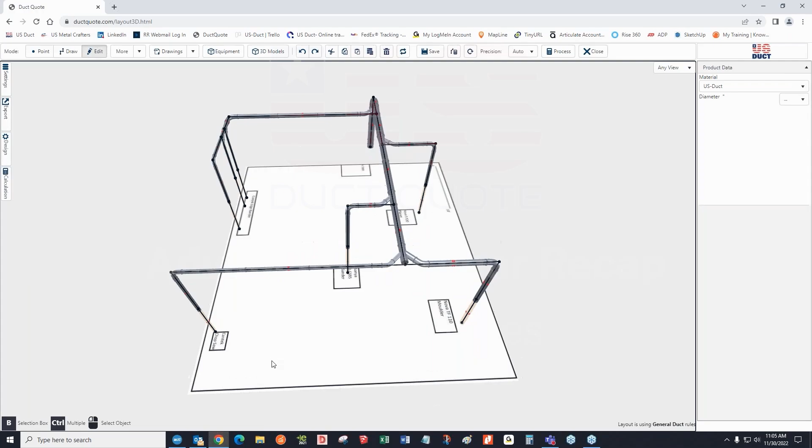I want you to think. DuctQuote is basing everything that it gives you on what you've built out in the design tab and the center lines that you create to tell it where the duct goes. All right.

This is actually what makes DuctQuote so fast and easy, is that all you have to do is draw a line between one point and the next. So you draw the center line and DuctQuote is going to fill in the duct and/or the fittings based on what you've got in the design tab and what you're doing.

Okay. So here we had someone who was looking for a Y branch, a pair of pants Ys. So they drew out until they hit where they wanted to have the trunks that left and went out to the various machines. And then they drew straight from the end over. And then they called me up and said, there's a problem. It keeps giving me a double branch.

Okay, now, so the first thing that you want to ask yourself is, okay, I'm not getting what I expect, so let's pretend that it's my fault. So what did I do wrong from the point of view of DuctQuote, right? So ask yourself, did you draw the center line of a Y branch, or did you draw the center line of something else?

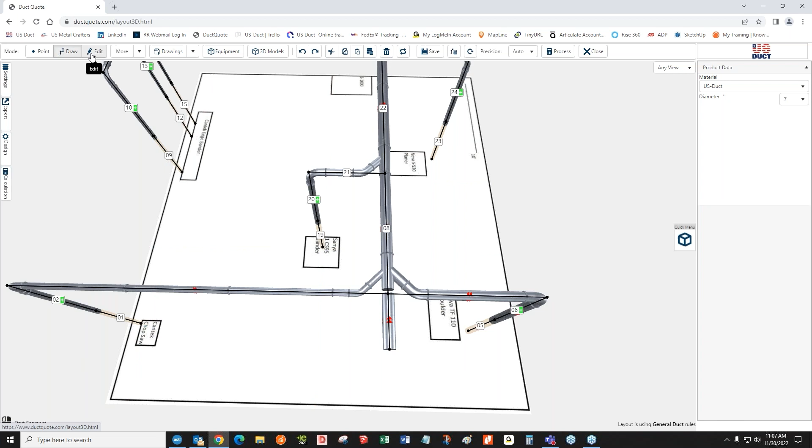We can also say that we're looking at this, and if I change what this is being told over here, where it is looking at a double branch, you can also see that this is also obviously the center lines for a T branch, right? But what we know for a fact is those center lines don't define a Y branch, okay?

So most folks ask the question at this point, they understand, okay, the center lines aren't right. So how do I fix this? Well, what we do is we use the ability in DuctQuote to move the endpoint of a section, not the section. And we're going to back these endpoints up to give us room to finish what we really want.

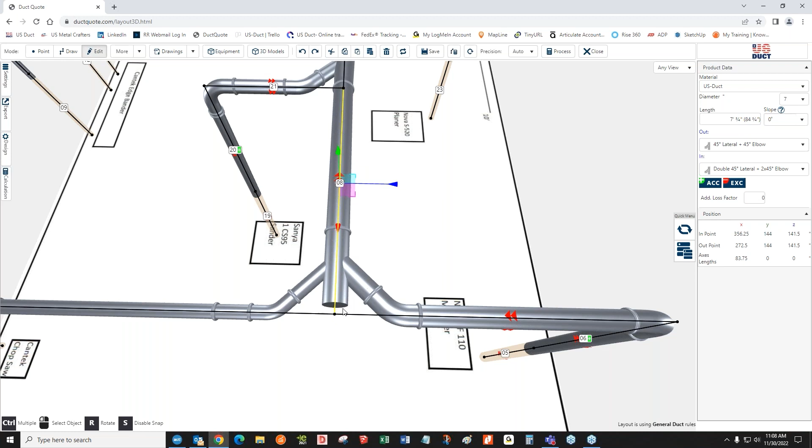Okay, so I'm going to click that endpoint and push this back some. I'm going to click that endpoint and bring it back some. And then finally, I'm going to click that endpoint and move it back some. All right. So remember, we're fixing something. So here's what I would do.

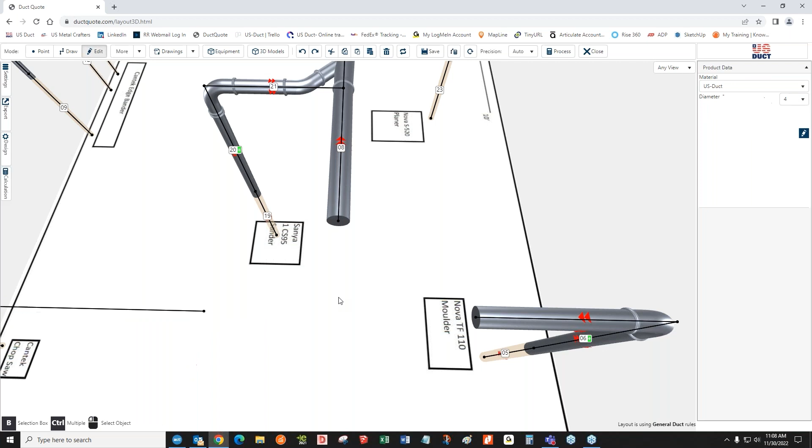I'm going to actually draw my Y branch over here, and this will teach you how to do it right the first time. You're going to come with your trunk to the end, then you're going to draw from that. I'm going to use a 45-degree Y branch. So I'm going to turn this at 45 degrees, and we click there.

Don't get excited about the fact that it gave you something different. I'm drawing with a different diameter than the trunk. So DuctQuote is making an assumption. That's okay. We're going to come over here and we're going to click and we're going to do the same thing for the other side. Okay. And now sometimes I have to select, but sometimes clicking on it is all I need to do.

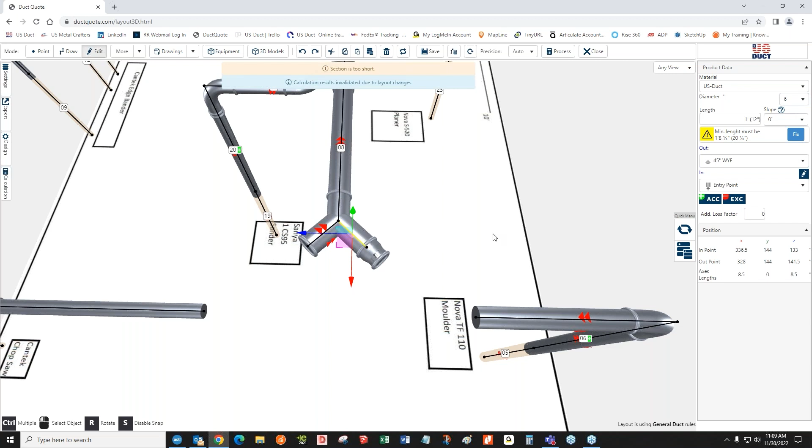As you can see now, DuctQuote recognizes those center lines define a Y branch, okay? So we can see that on this side, we want that Y branch to be a 6-inch. So I'm gonna set this side to be not 4, but 6, okay? This side needs to be 4. So we're gonna set that side to 4, all right?

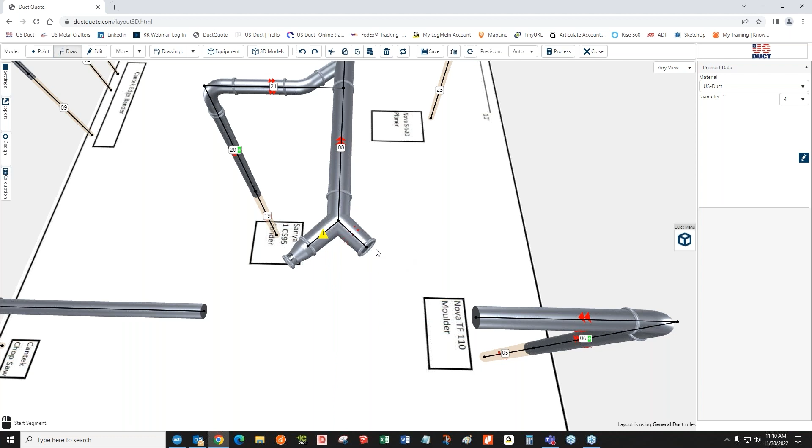And now I'm going to draw a small bit so that it represents these trunks. In other words, I'm going to do this so that I get my elbows in here, okay? So let's go ahead and draw the 6-inch side. We don't need much, just a little. And remember this side is the 4. So we're going to draw a little bit of 4-inch.

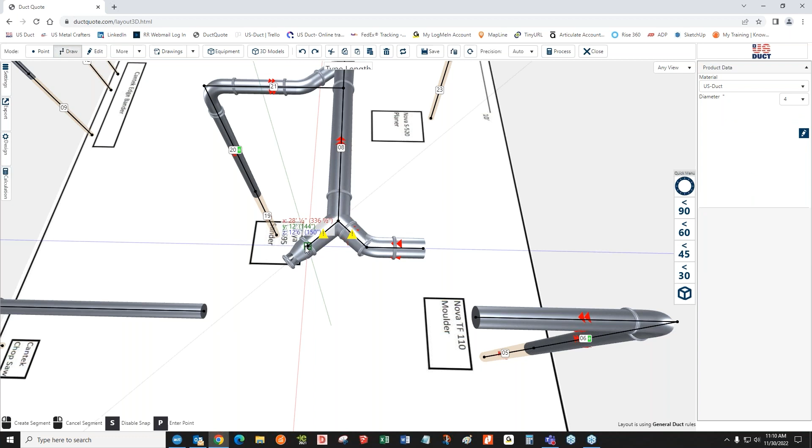Okay. And what I wanted to happen has, and that is that I'm being told these are too short to include the elbows. So we're going to go ahead and let DuctQuote fix that so that we get just the Y branch and the elbow. That's all we want.

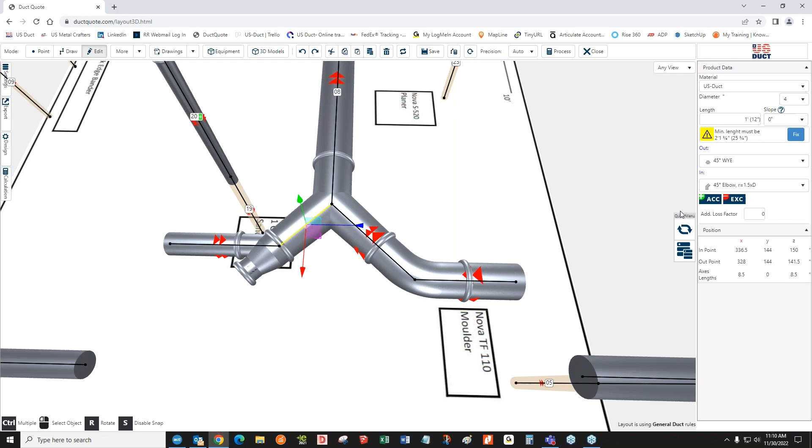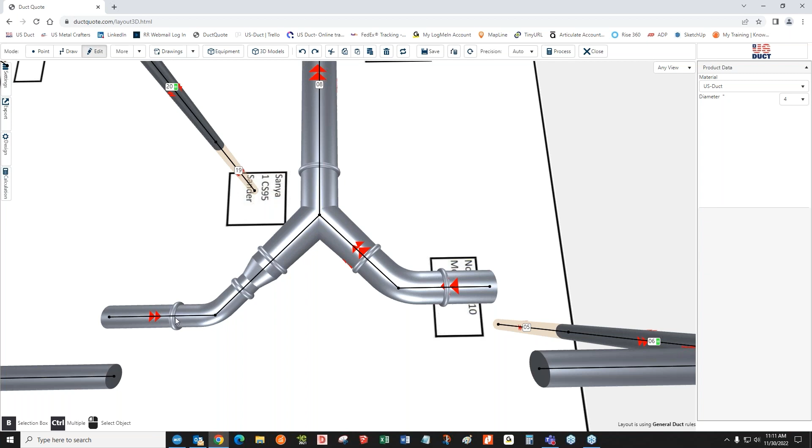Okay. Now, in this particular case, notice we need a reducer here, and the reason DuctQuote puts a reducer here is that going from an 8 to a 4 is more than 2 sizes. And simply put, we cannot get the cones correct to fit and weld if we are more than 2 sizes off on these branches. So we get a 6 to a 4 reducer, okay?

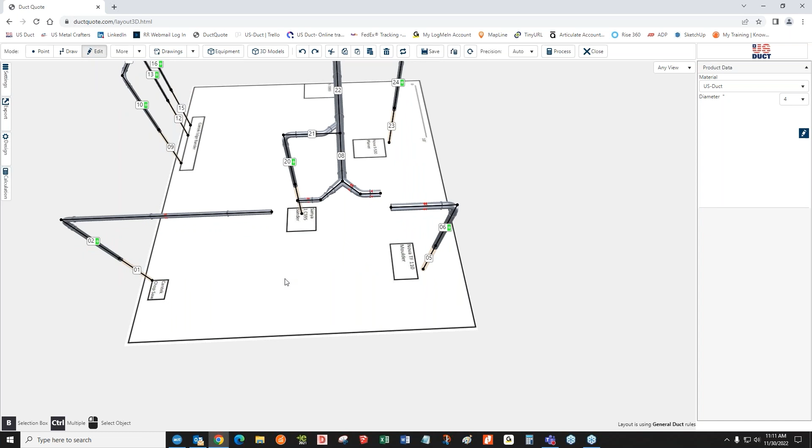All right, now I'm going to back this one up just a little bit more because we need it to be out of the way slightly. And here's how I get things set up. I first have to make a decision, which is easy in this case because I'm using a flex hose connection here. So I don't have to have this lined up perfectly here. We can move it a few inches off, but I'm going to take this Y branch and the elbows.

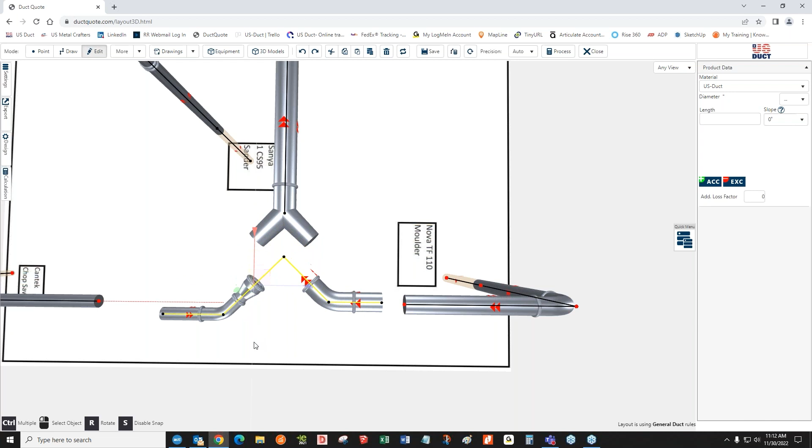I'm going to select it using the selection box tool. All right. And then all I'm going to do is move it down so that it is in line right there. You can see the snap happens. It's in line with this trunk.

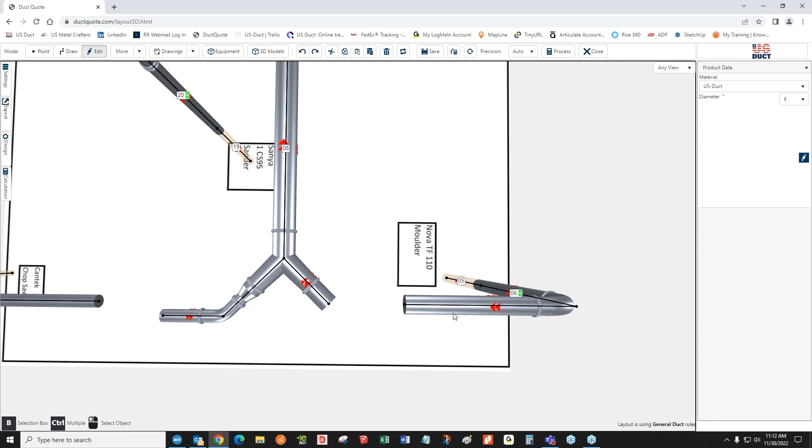Okay. And then all I have to do is where I backed that off, I'm going to bring it forward again. And we get back our Y branch. This is now lined up so I can trim that off and I can bring this back, let it connect, and that side is ready to go.

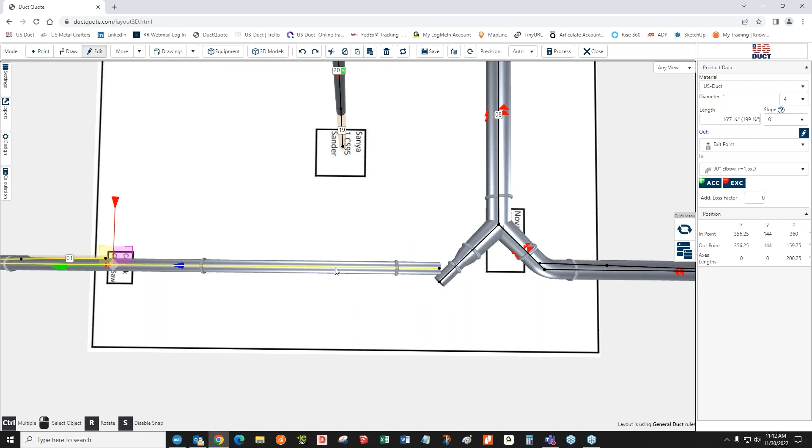Now what about this side? Well, this is as short as we can have this. So what I'm going to do, again, we're going to bring this over to where it's even with that. Trim that little piece off. I'm going to double click, which selects the whole section there. Then I'm just going to nudge it over and let it connect. And there we have fixed it and have the Y branch that we want.

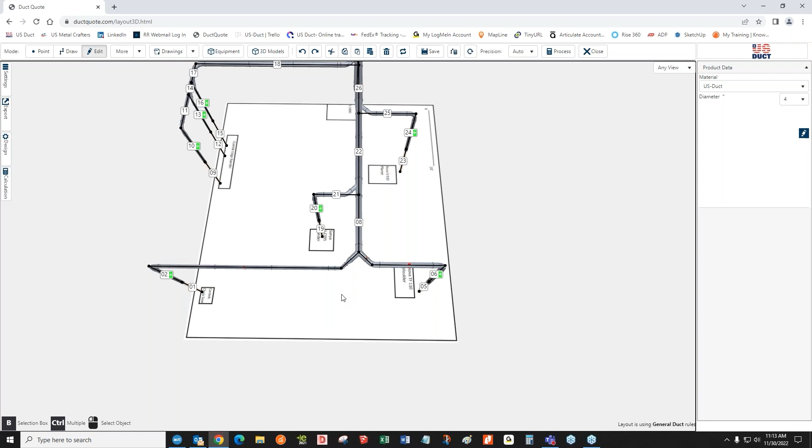Okay. All right. So we showed you how to do it right the first time. We showed you how to correct it, and we showed you how to figure out how it had gone wrong. All right. So that's hopefully covered Y branches.